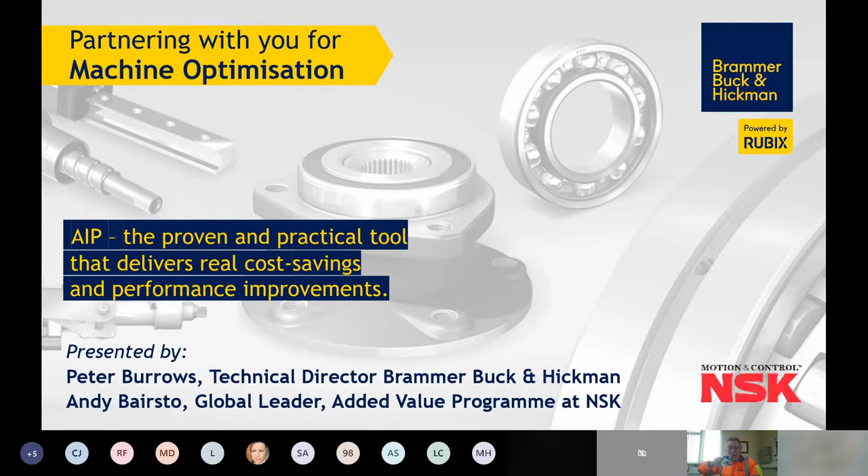Today's webinar is really aligned with our company strategy: advise, apply, advance. Advise, anticipating customer needs. Apply, delivering innovative products and solutions. And advance, creating value with technical and advanced services.

Our webinar today is all about how we can improve productivity through improved reliability and partnership with one of our core suppliers, NSK Bearings. My name is Peter Burrows, Technical Director for Brammer, Buck and Hickman in the UK. But today's presentation is being delivered by a very good friend of mine, NSK's global leader for their value-added program, Andy Bairsto.

As Pete's already said, today really is about raising awareness of our Asset Improvement Program. AIP's been around for a few years now, and it's really focused on creating value for end user customers by combining the technical knowledge, the products and the service range of NSK with the knowledge that we acquire working with our distributors at your end user plants, to understand the issues, the challenges and the objectives that you guys have got to deal with on a day-to-day basis.

It focuses on the three assets of plant: production machinery, people and processes, otherwise called assets in NSK terminology. Delivering improvements in all three of these areas makes a positive contribution to the bottom line of your business. So we're really looking for opportunities to improve in the plant, in the people, and in the processes.

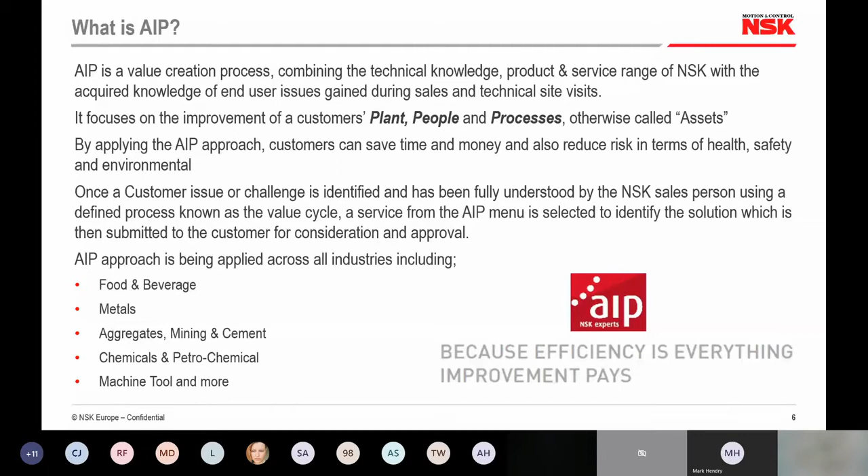This is the value cycle approach, how we identify a problem in the first place and take it through to a successful conclusion. It starts with the first step, called evaluation. In other words, we talk to you, the customer, we take information from you about the challenge or the issue that you're trying to address.

If possible, we like to visit site to look at the physical asset, whether it's a machine, whether it's to speak to people if your issue is knowledge, or whether it's to investigate a process to see where process improvements will be. It's also possible to do the evaluation stage online, virtually, which is very important given the current situation.

Once we've got that data and analysed it, we'll come back to you with a recommendation, using our learning, our knowledge, our experience to create a solution. At that point we'll also try and forecast what we believe the benefits and the savings will be by taking on board our recommendation.

Third stage, if you're happy with the recommendation from us, we can help you with the implementation if necessary - for example, assistance in bearing installation, bearing lubrication, bearing alignment, or some other form of assistance if necessary. And then when it's operational, if we need to refine it further for improved performance, we can also assist and support in that phase too.

The next step, step 4, is validation. When we do the evaluation initially, we try and understand the cost of the problem to your business. At stage 2, we try and forecast the savings. So at stage 4, we want to make sure that we're on track to deliver those savings as forecasted.

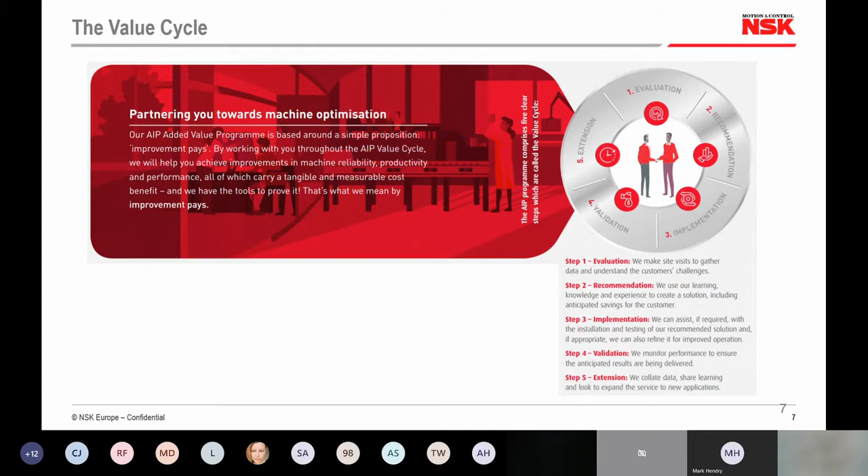This is the service menu. So really there are 4 quadrants to this menu. I'm going to focus on all of the aspects of the menu very briefly as we go through the presentation, but I would at this point just like to stress the survey section, because this is really the starting point.

If we can do a store survey, if we can do a workshop audit, if we can do a process map of your production process, and if we can get some bearing data from you in terms of the codings, the part numbers, and the consumption of bearings, we generally find that we can find areas for improvement that will improve reliability or will reduce your costs. So that's a really good starting point to work with us into the store, in the stores, in the workshop, and in the production environment.

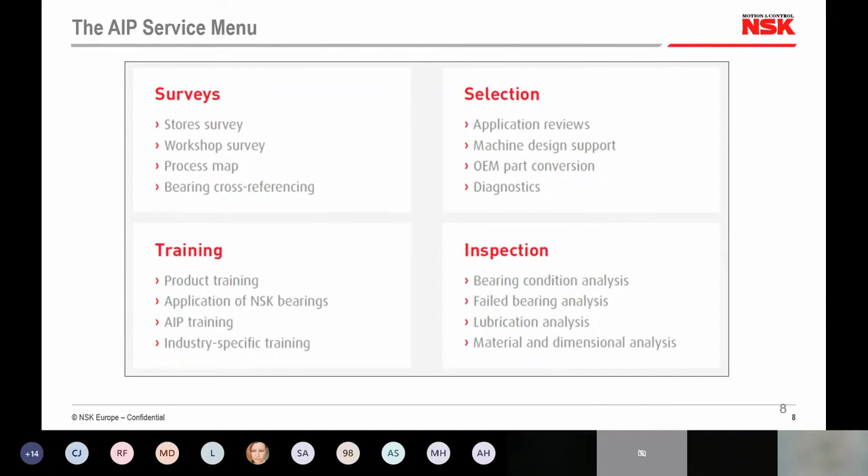But let's have a look at each one individually. First of all, the store survey. What is it? Well, it's a survey focused on the storage and handling conditions. It's focused on your current levels of knowledge of bearing coding systems. So again, we're looking for bearing part number accuracy, etc. And we're also looking to identify any damaged or obsolete parts. Damaged parts can be a risk because if they're inadvertently fitted to the machines, they're going to fail prematurely. It's going to cost you some money. So identifying these kind of components is a very important part of this service.

It's an opportunity for you to potentially rationalize and reduce your inventory costs, which will release working capital. And it's also a good opportunity for us to understand your bearing stock, so we can make best practice recommendations on the selection, the storage methods, and the stock rotational process. The benefits for the customer: documented review, supported with digital images as necessary, a bearing condition assessment where we'll identify good quality, damaged, or somewhere in between. Maybe the packaging's damaged, but the bearing itself is fine. We'll make some recommendations on what we find.

Also an opportunity to consolidate stock. Maybe you've got the same bearing, but under different part numbers in different locations in the stores. Again, that's dead money tied up or duplication. It also helps us to understand your brand preferences, to give us a flavour of the preferred brands that you're working with, and where that might present some further opportunities for rationalisation or standardisation.

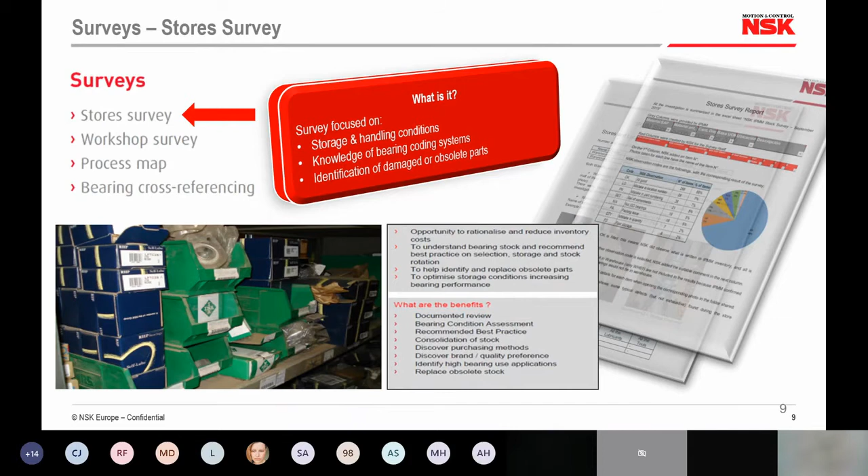Workshop survey is really an audit focused on the condition, the tools and fitting practices, and any workshop standards that may or may not exist in your maintenance or engineering workshop. This, again, the ultimate objective of this is really to identify ways to optimize the bearing fitting practices, lubrication practices, and also identify any particular training needs or opportunities to improve the knowledge of your maintenance technicians and the engineering team in general.

Also, in the absence of any existing workshop standards or standard operating procedures, we can recommend standard work instructions for the installation, lubrication, and safe removal of bearings. So again, adding value and creating a safer working environment for your maintenance teams and a more financially stable environment. What do you get from a workshop survey? Again, we provide a fully documented assessment, including digital images, a certificate when the required pass mark is achieved, and it's an opportunity again for the engineering contacts in your organisation to meet the sales engineers and the product specialists from both NSK and also from Brammer Buck and Hickman.

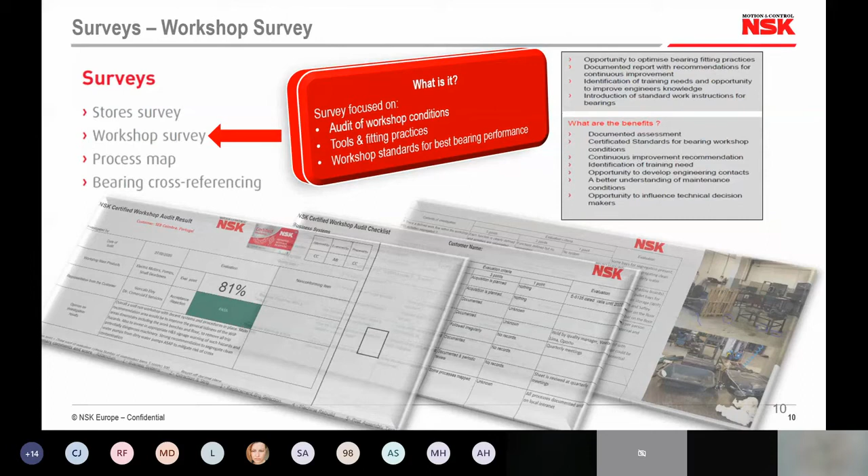The process map is a survey focused on completely documenting the key assets in your production process, with a particular focus on mission critical bearing applications. Even small bearings, small deep groove popular metric bearings, if fitted to a mission critical piece of equipment, when it fails, it's putting your business at risk.

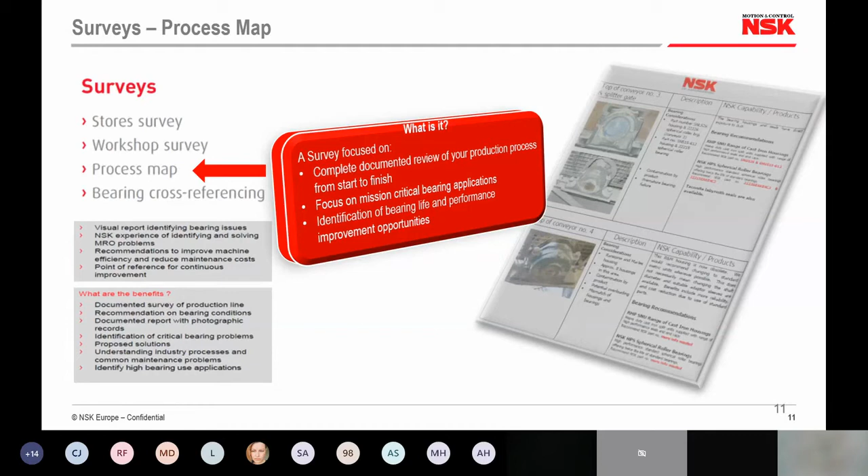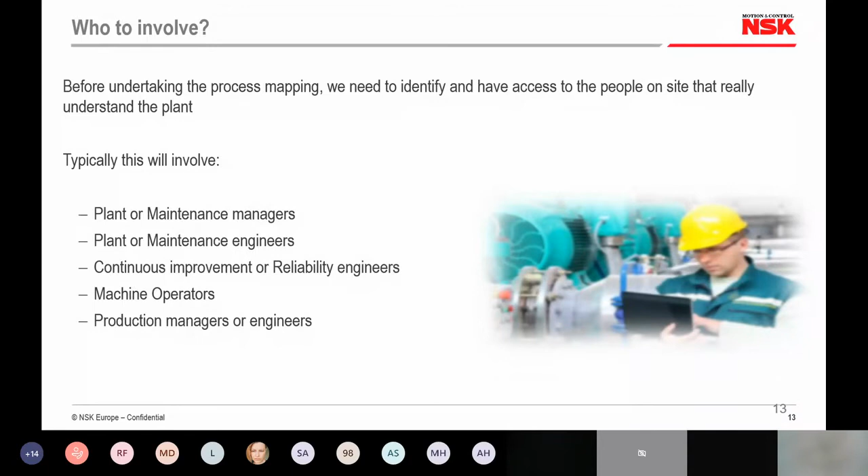When doing the process map, it's very important to have access to the right people. So one of the first things is to identify the right people on site who really understand the plant and the issues. Typically it could vary from plant or maintenance management teams, plant or maintenance engineers, continuous improvement or reliability engineers, but also machine operators and production managers can be very helpful too, because operators are often the first to notice any change in operating condition. So a process map involves interacting with one or more of these job titles.

It's a start to finish process. It's very important for us to start at the raw material stage and end at the finished product output stage, because that way we can link any problems we identify with potential problems further down the line or earlier on, either upstream or downstream. So it's very important to do it as an end-to-end project.

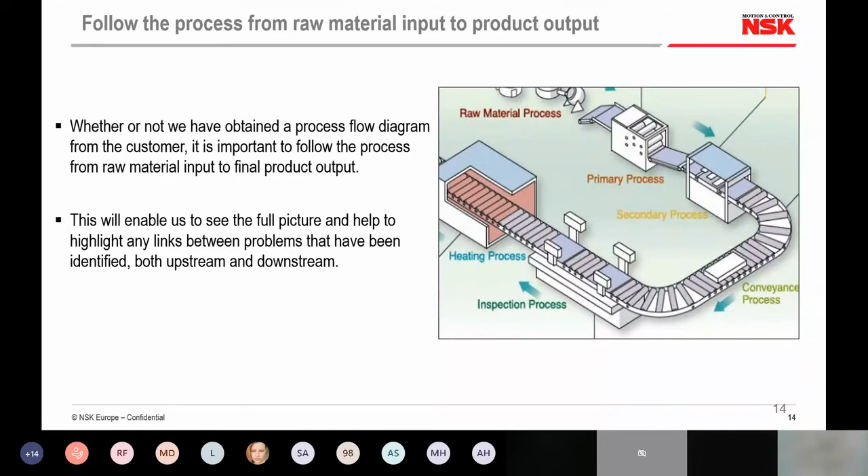The fourth survey is what we call the bearing cross-reference. In essence, it's a bearing data cleansing exercise to make sure you've got the right part numbers in place, because bearing part numbers can sometimes be a little confusing. One digit, one letter, or one number difference can make a real difference to the performance of the bearing, for example internal clearances. So it's very important that we do this check to make sure you've got the right information.

We'll also, in doing this survey, ask for the consumption data too, if you're happy to release it to us, because in that way we can look for opportunities to reduce your consumption of bearings, and in doing so reduce your maintenance costs and expenditures. So we'll come back to you with a full report. We'll leave your original data intact, but we'll also add some NSK part numbers to the spreadsheet, giving you the option to buy the NSK brand moving forward if you prefer.

So there are a number of benefits really: the opportunity to rationalize and standardize your inventory, the opportunity to improve your bearing performance, and definitely the opportunity, as I said earlier, to reduce your bearing consumption.

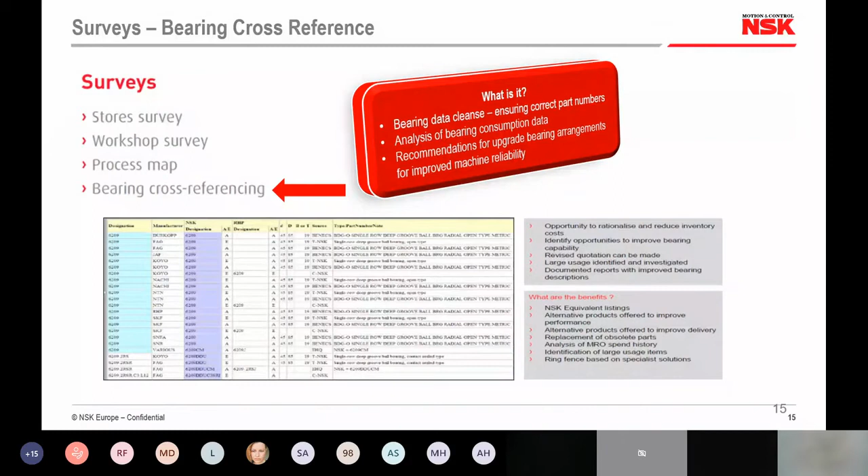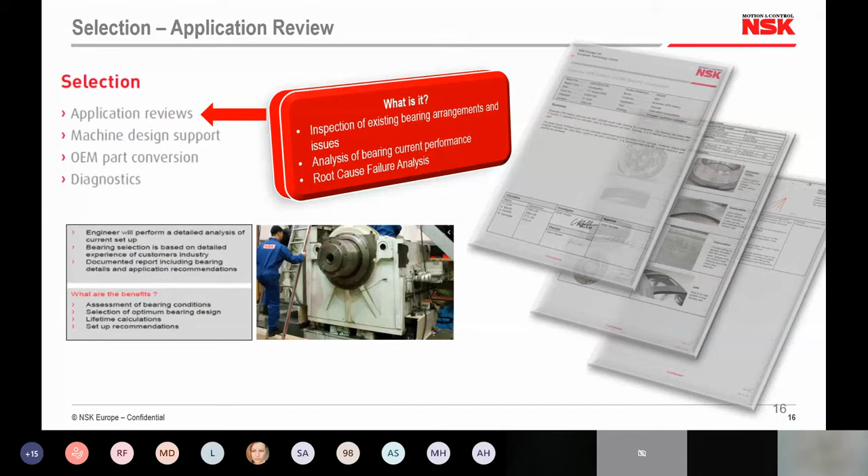The other elements of the service menu, first of all, application review. This is where you bring us a problem, or we identify a problem on a particular machine. This is where the NSK engineer, working with the local Brammer, Buck and Hickman guy or product specialist, would come to site, ideally, to inspect the existing bearing arrangements giving you the issue. Then we'll analyze the current bearing performance, and ultimately come back to you with recommendations on what the problem is and how to solve it. It's a documented report like the one you can see on the right, which we produced in North Yorkshire for a BBH customer fairly recently.

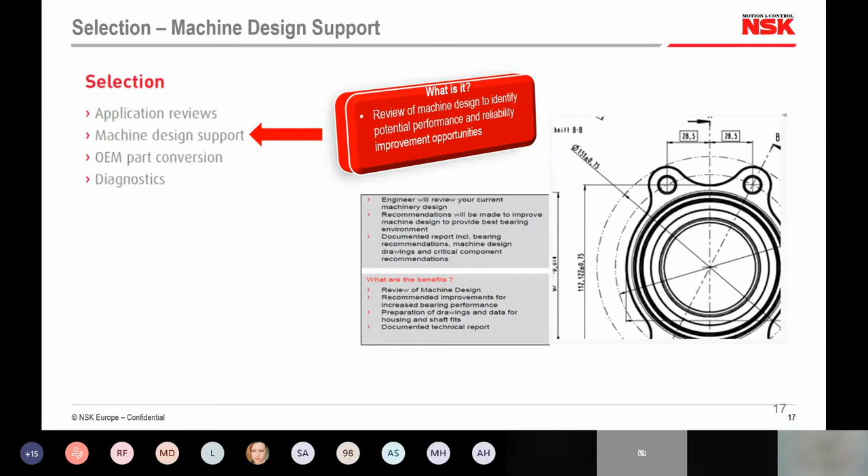We also offer machine design support. So if you're looking to change the performance characteristics of one of your production machines, make it run a bit faster or take a heavier load, those new demands will put pressure on the existing bearing arrangements. This is where we can work with you to select the correct bearing arrangements for the upgraded output requirement, produce the dimensional drawings, give you all the technical data about speed ratings and load ratings, and provide a series of options for your consideration. This ensures that whatever changes you make to your machines, you get the optimum bearing arrangements.

You're probably familiar with this one anyway, OEM part conversion. If you've had new equipment or new plant installed recently, it will probably have come with a recommended list of spare parts from the OEM. Generally speaking, prices from the OEMs will be somewhat higher than from industrial distributors. So this is an opportunity for us to identify those OEM spares, cross-reference the part numbers where we can to standard commercially available bearings, and give you the current price and availability on each item.

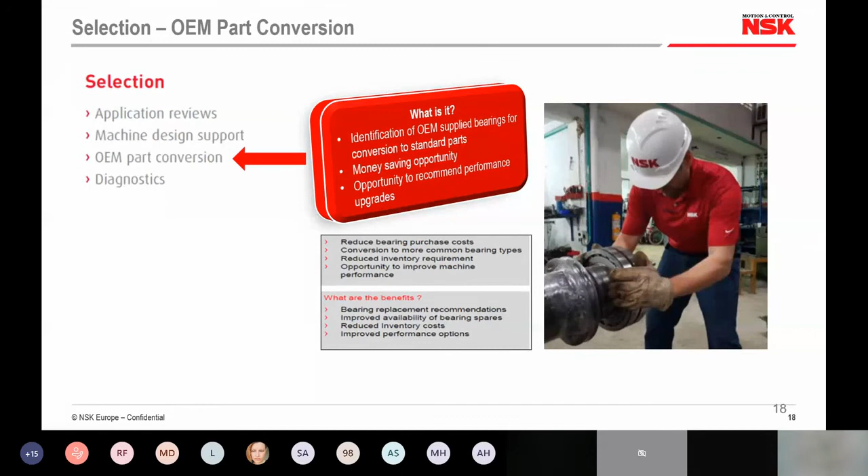We offer a diagnostic service, which ties into the first reliability seminar from Brammer, Buck and Hickman a few weeks ago, when Jason Tweedy covered condition monitoring. So this is a collaboration with you, the end user customer, the Brammer, Buck and Hickman guy, and the NSK guy, to identify the onset of any defects in the bearings while they're operating. Getting that heads up before a catastrophic bearing failure occurs is obviously a good thing to do.

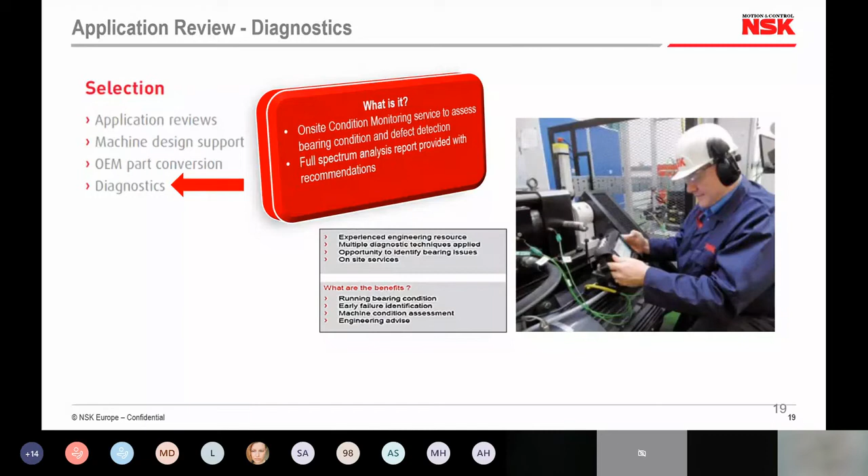We have a guy in the UK that works alongside the BBH team called Colin - this is him in the picture here. He's Level 2 VA qualified, and with his box of tricks he provides full spectrum analysis to try and identify the current bearing condition and make predictions about what you need to do before the thing fails.

A very important offering is the training offering from NSK. The first part of this is really focused on bearing knowledge - good for apprentices, people new into engineering, or anybody involved in the fitting, maintaining and replacement of bearings. We can do this face-to-face when conditions permit, or as a virtual online course. This is about improving skill levels in engineering teams when it comes to bearings, with multiple access points available. I'll give you a flavour of the detailed modules available in a few slides' time.

We also offer a lot of training on the application of bearings - a selection of courses for people involved in using and fitting bearings. It's a modular menu that allows you to pick whichever modules are right for your business. It's not one-size-fits-all; you can choose whichever ones are right for you, combining both practical and theoretical modules.

We can deliver these on site, or under COVID-19, as a virtual session like we're doing now. The benefits of going through these courses are improving understanding of bearings for certain applications, and understanding why bearings fail and what to look for, since we cover the most common failure modes. We share pictures, or in face-to-face training actual examples of bearing failure modes. It also provides an appreciation of best practice fitting techniques, and an understanding of bearing accuracy and its effect on performance under normal operating conditions.

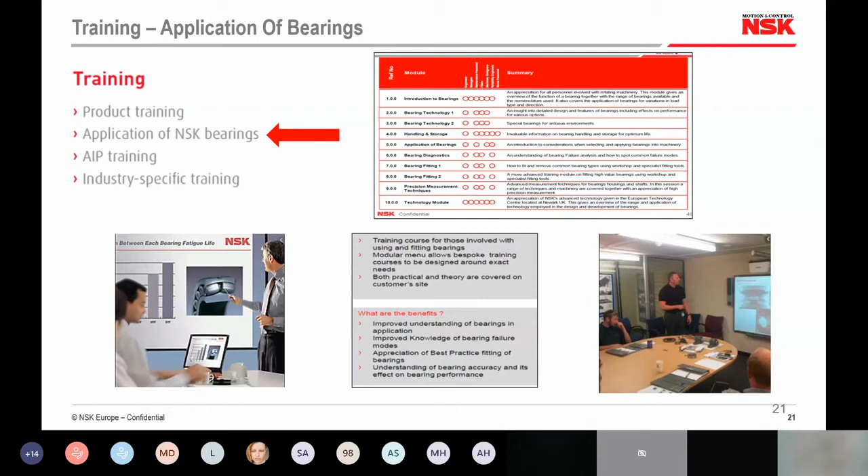And this is the menu. It starts at a very simple level, introduction to bearings, covering the different types of bearings and the different loading characteristics they're designed to deal with. Then moving up to Bearing Technology 1, an insight into the detailed design features of bearings, and then the more specialist Technology 2 courses. There's also a course for handling and storage of bearings - one that's often overlooked, because the first point of call for a bearing coming into your plant is normally the stores.

The way a bearing is handled and stored can have a major effect on its actual operating life. So it's good practice to make sure the guys in the stores fully understand how they should and shouldn't handle and store bearings. There are other different modules for different types of bearing related subjects. So if you're interested and wanted more information, or a copy of this, please feel free to contact Peter Burrows at Brammer Buck and Hickman, and he can supply the detailed menu.

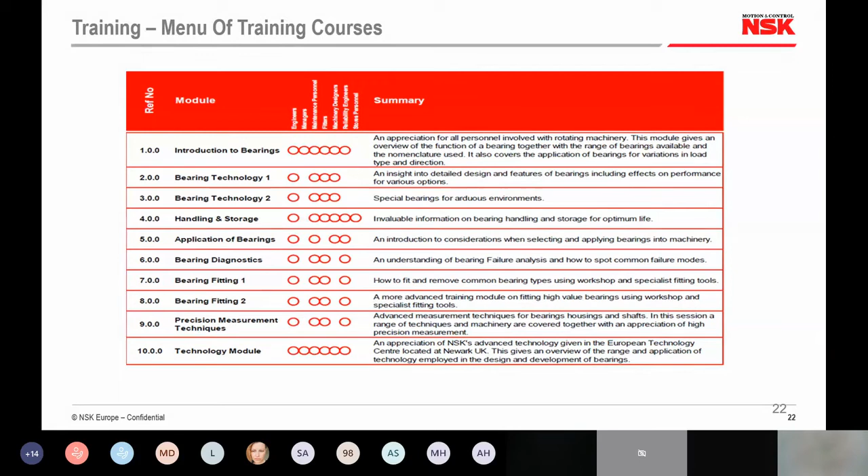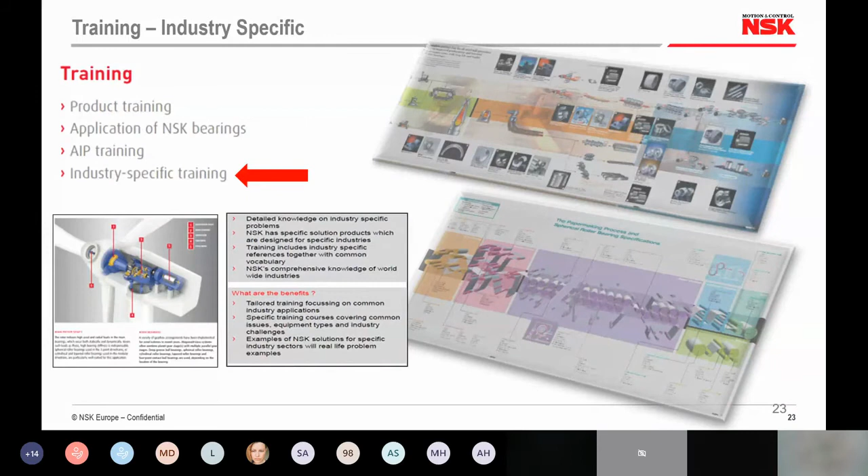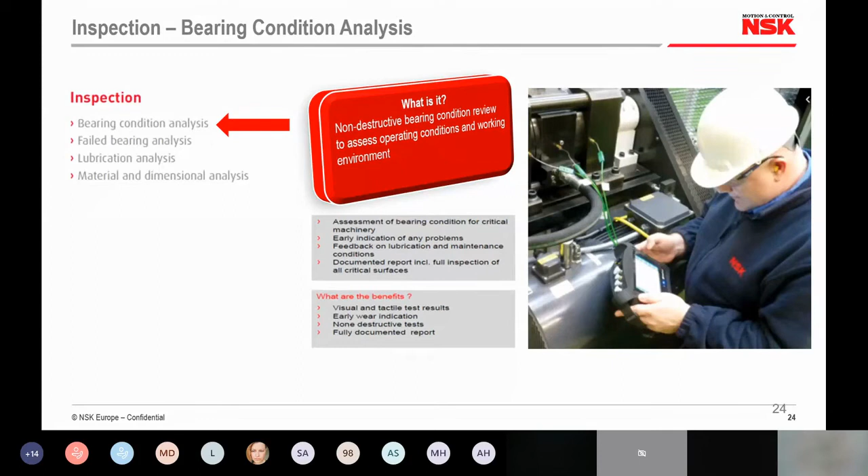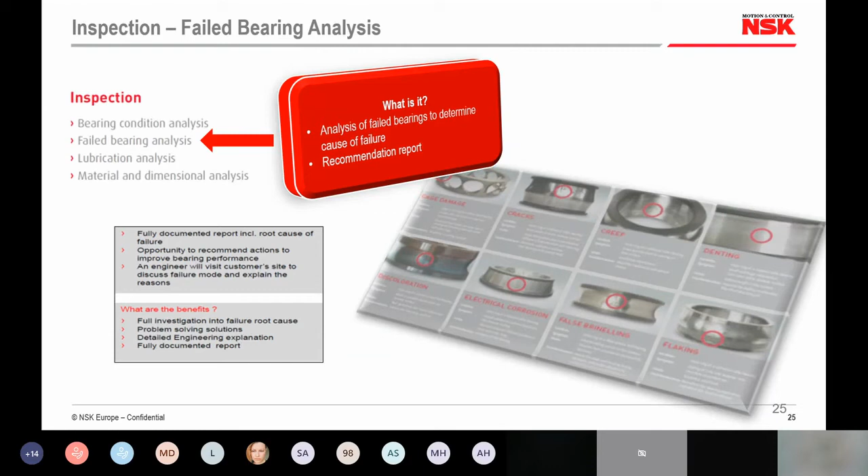We also offer a failed bearing analysis service. If you experience bearing failures, particularly recurring bearing failures on an individual application, this is a service whereby when the bearing that's failed comes off the machine, if you can bag that bearing in its condition as it comes off - don't clear any lubricant or contaminants out, just bag it in its failed condition - you can send it back to Brammer Buck and Hickman, they'll send it to us, and we will do an analysis on the failed components: the raceways, the rolling elements, the cage. We'll look at any lubricant residue left in the bearings, and all of that information will give us a good clue as to why the bearing failed. We can then come back to you with recommendations to prevent future recurrence of that same failure mode, with a full detailed report and alternative upgrade solutions where appropriate.

The other part of the AIP program is lubrication analysis - analysis of the bearing grease or oil to identify condition, contamination, water ingress, or oxidation. 52% of bearing failures are due to contamination of the lubricant, and when you look at all rotating equipment failures, around 20-21% are down to bearing failures. So it's a key area to have a good understanding of and be on top of. We can offer this as a service - if we can get samples of your grease, send them across to us and we can do some analysis and give you a report on the current condition with recommendations where we find wear or existing contamination.

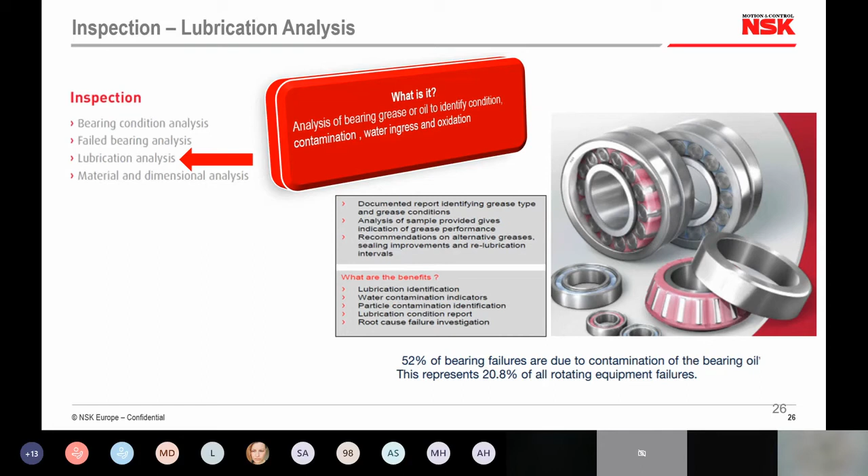Finally, we offer a service for large diameter bearings. This is probably more appropriate for heavy industries like steel, metals, mining, aggregates, and cement, where we do a full material and dimensional analysis using our 5 core competencies of tribology, materials, numerical simulation and mechatronics, as well as manufacturing engineering expertise. We'll look at the material condition, do dimensional checks on the bearing, checking for roundness, etc., and come back to you with our determination of what caused the bearing to fail. This is a very specialist service done in our European technology centres, so it does have a lead time depending on the size and nature of the bearing. But for heavy duty, large diameter bearings, it is a valuable value-adding service.

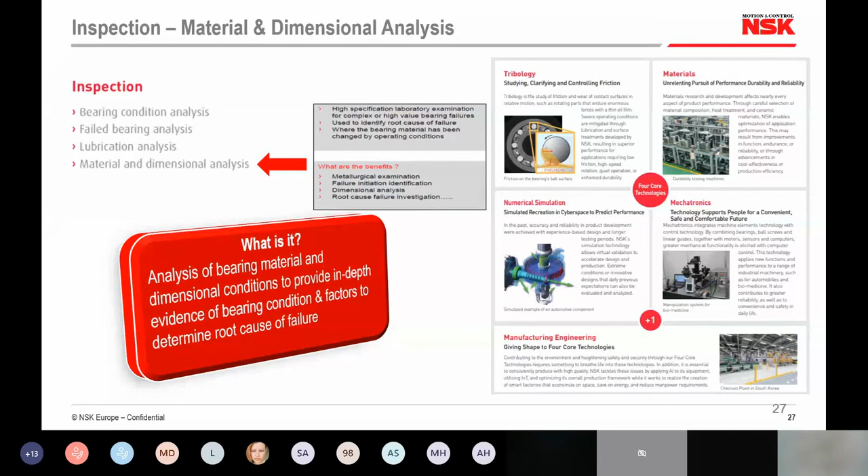Okay, so that's the AIP program. Just to wrap it up, really, what's in it for you guys, the customer?

Well, first of all, it completes the circle. You get good availability of the bearings from Brammer Buck and Hickman, customer service from Brammer Buck and Hickman, and we can also now enjoy the NSK technical support and value-adding solutions as part of that process too.

The ultimate objective is for us to increase the efficiency, effectiveness, and reliability of your plant, your people, and your processes. In doing that, we maximize the productivity of your business. There are also safety benefits of improving the reliability of your rotating equipment and machines, and there's no doubt there's a direct correlation between highly reliable plants and safe plants.

You'll have improved skills for your people, so better skilled people. So again, from selection, handling, installation, and ongoing maintenance of your bearings, you're giving the bearing the best possible chance to last as long as possible, reducing your maintenance costs and improving your output, which means your customers will be happier too.

There's optimized inventory benefits. I mentioned a few times through this session, looking at your stock profile, improving that profile, getting rid of any damaged or obsolete stock, and optimizing stock levels will have a positive impact on your working capital.

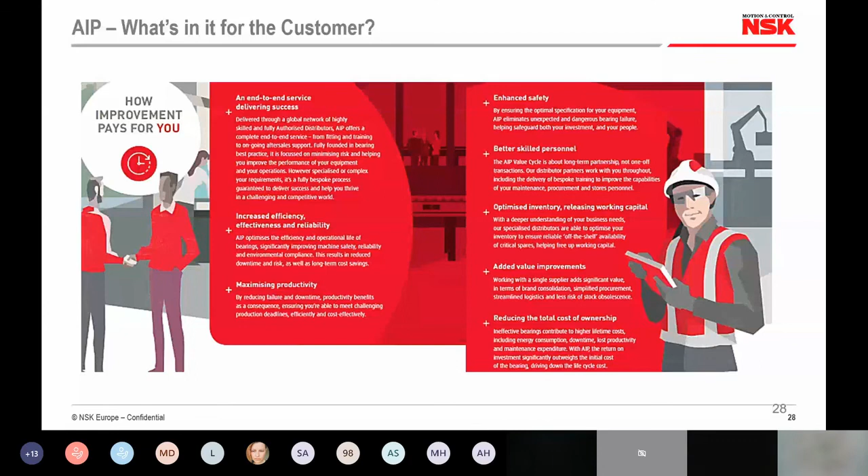Adding value in other areas too, there'll be lots of opportunities along the way through these insightful conversations with you for us to find other value-adding opportunities. So ultimately, we're reducing the total cost of ownership of the bearings. It's not just about buying the bearing, it's about getting the maximum value through its operating life and ensuring you are managing those costs to get a positive return on your investment on all your bearing purchases.

Okay, so does it work? Yep, it absolutely works. So here are some examples. These are all joint Brammer Buck and Hickman NSK solutions in the UK.

You can see a couple here from Tata Steel in Scunthorpe, one of which was a £263,000 saving. The one in the middle is a £355,000 saving. And the one on the right, I would just like to say a few words about.

This was a deep groove ball bearing, 20mm or 25mm bore, a fairly small bearing. But these bearings were being replaced after a few hours of installation due to contamination. Just a simple upgraded seal arrangement, which was a few pence more on the price of the bearing—seriously, a few pennies, not pounds—resulted in reliability improvements that delivered over £500,000 worth of documented savings for the customer. So this approach really works.

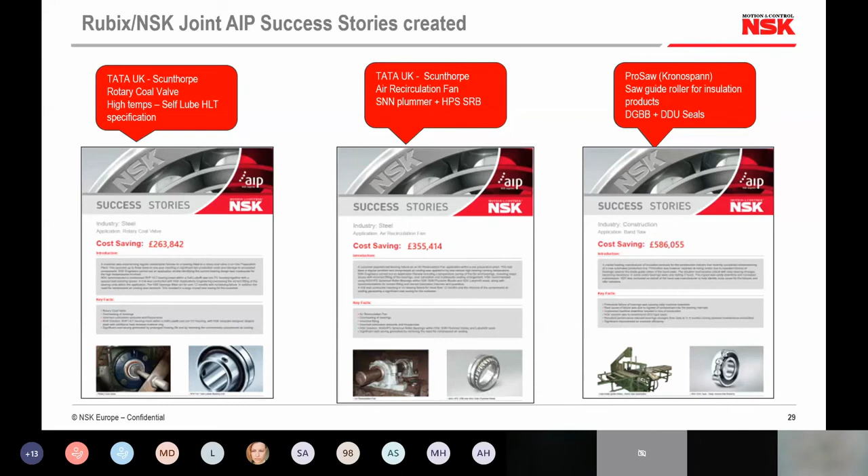But all of these are impressive examples of documented savings where the customer's been happy to acknowledge and sign off some documented savings achieved by working with us as a 3-way collaboration.

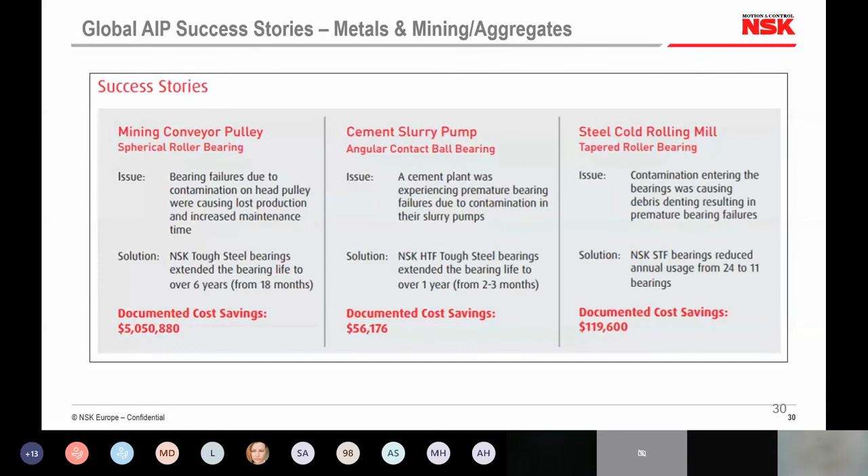I just want to point out the first one, the $5 million one. The original bearings installed on that plant, OEM bearings, were from another world leading 3-letter manufacturer, and they were lasting 18 months. We were able to recommend our solution, tough steel bearing, which is unique to NSK, and we extended the life to over 6 years between failures. A very impressive example of how working with the experts, we can really deliver some value-adding solutions.

So just to finish, improvement does pay for everybody. From a Brammer Buck and Hickman point of view, it means these guys can understand and work closer with you to have a better understanding of your challenges, and hopefully that leads to a much longer mutually beneficial partnership together. And for you guys, more importantly, the end user customers, it delivers real savings that hopefully you can put in front of your senior management, proving that maintenance is really adding value in your organization. Because when it's done well, there's no doubt maintenance is a profit contributor, not a cost center.